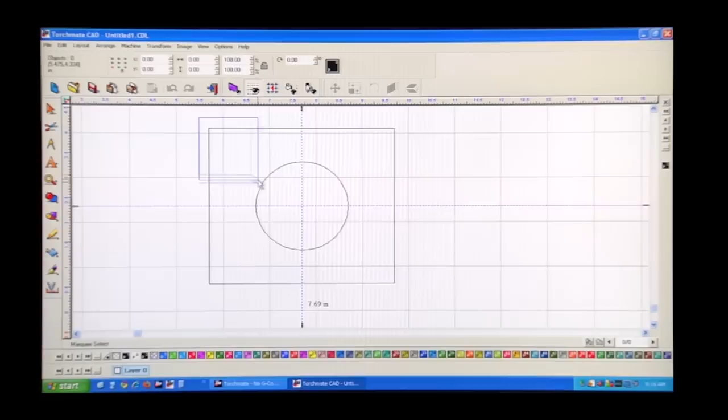We'll select both objects and we'll tell the computer that the circle is part of the square, so it's a hole now. And what that does is it tells the computer, here's my square with a hole cut out of it.

With Torchmate CAD, the important thing that it does is it will do tool paths. So anytime you're cutting, you want to specify the cut order. You want to cut your inside parts out before your outside parts. You want to have a lead in, because when plasma pierces, the pierce point is a bit wider than the rest of the cut. So you don't want to start right on the cut. You want to pierce, say, in the middle of your circle and move in and pierce on the outside of your part. And you also want to offset, because when you're cutting with plasma, there's a certain thickness to that cut, and if you cut right on the line that you drew, your part's not going to come out the right size. So Torchmate CAD, when you tool path, will do all three of those automatically.

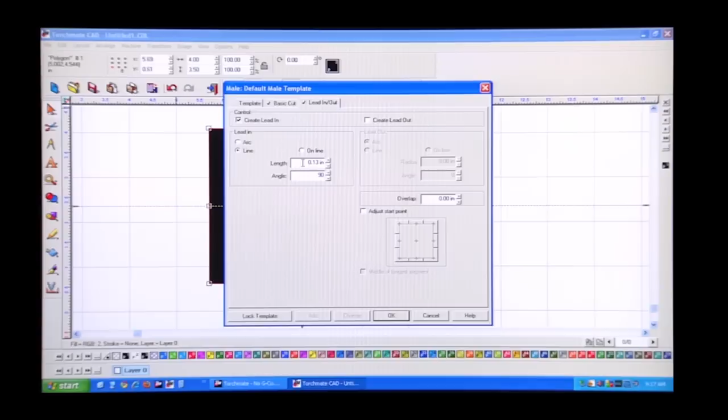So we'll just start out here, just create a tool path, tell it the length of the lead-in I want, tell it the tool that I'm using so it knows how much to offset, and we'll create that tool path.

And so what you can see that Torchmate CAD did as I zoom in here is we have our original object and we have the tool path it created. The tool path it created is offset a bit to the outside for that thickness of the cut, so that when you actually cut it out, you'll get the right size rectangle. It also created a lead-in, which is this is where it's going to start cutting, so that you're piercing and you're not messing up your actual cut.

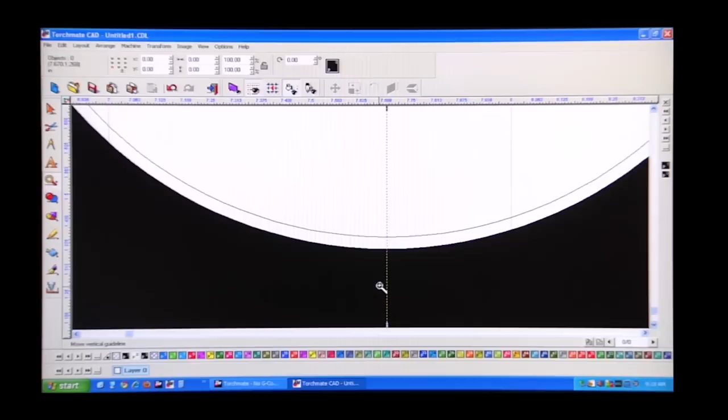So if we zoom out here and we look at the inside, we can see that it's cutting on the inside here, so you get the right size shape. The nice thing about Torchmate CAD is whether you're drawing in here or drawing in another program, bringing it into Torchmate CAD and tool pathing ensures that you're getting the right size parts with a clean cut every time. This is ready for cutting, and if we wanted to, we could go take this out and cut it. But we want to do a more advanced shape, so I'll delete the tool path for now.

We have our advanced shape here. Let's say we wanted to round a corner. I can go up to transform and tell it to round a corner. Enter the radius of the corner. Click on the corner I want to round, and then close it. So now that corner is rounded.

At the same time, if I wanted to insert a slot, I can do that, and I'll turn off the fill here. Just a useful tool to keep track of where your holes are and everything, but go ahead and draw a slot in here. I can size this as to whatever I want.

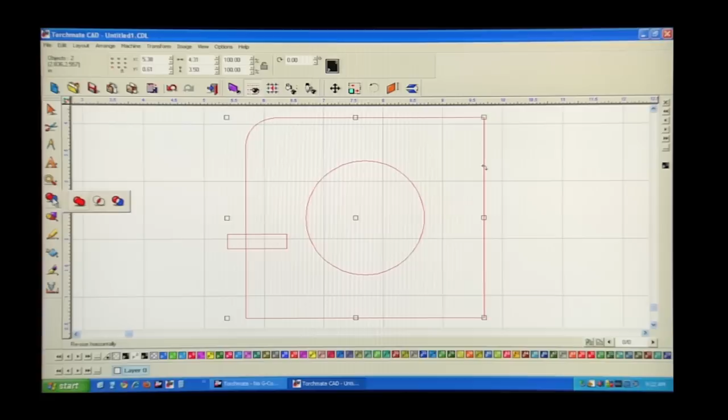I can then tell the CAD I want to cut this out as a slot, getting rid of our little remnant here. So now we have a slot in this part. Again, if we wanted to cut this out, we can go ahead and just tool path it.

Torchmate CAD is useful for drawing pretty much any shape, but if you had a bitmap, a JPG, or any other type of image from the internet or something you've drawn in another program, you can bring that in and create a toolpath on it as well and get that ready to cut.

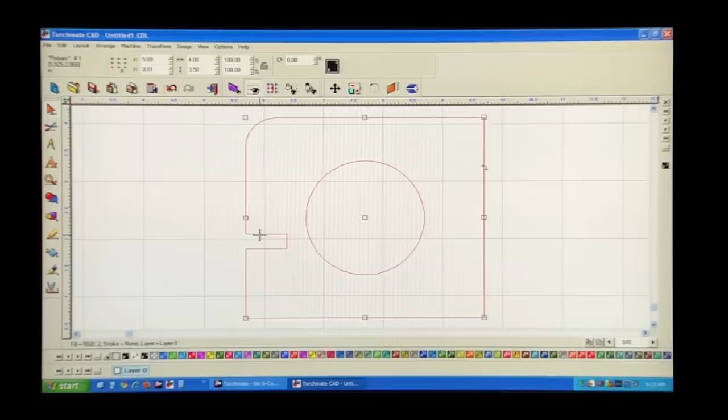So I'll bring in an image here real quick and go ahead and place that. Now it's rather small, and I can just grab it and size it up, or again, just like anything else, I can type in the size that I want. Let's make it 5 inches by 5 inches. We'll just zoom in on that.

So here we have a bitmap, just something drawn up off the internet. I'll go ahead and convert it just to black and white, so no grays or anything like that. And then we'll use our scan tools that are built into Torchmate CAD, and we'll go ahead and just do a quick trace on this.

And what Torchmate CAD will do is it'll go around and it'll find all of the lines of the image there. So we can close that now.

And what we have is our original bitmap. If I move that off to the side, we have the trace of the bitmap that we just did here. This is a simple trace of this object, and depending on what type of object this is or what quality of image you have, the trace settings can be changed to get you the best quality.

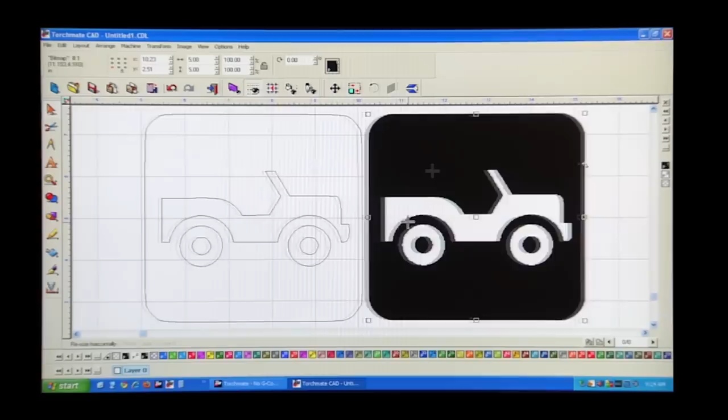So we're done with this image, and now we can go ahead and delete that, and we can work with our trace and get it ready to cut something out here.

So the first thing that I see is we want to go ahead and tell Torchmate CAD that this is all one object. And we can see in here that it sees it all as cutouts and everything like that. Now, one thing that when you're bringing in any image, it's just going to go ahead and trace that image, and that image might not be suitable for cutting right off the bat, but we can make it as such.

So I can see here on these little rims that we just cut those out, those little things will just fall right out. They're not attached, so we can either bridge them to the rest of the sign, or we can even just get rid of them. So for this one, we'll just go ahead and get rid of them.

We're cutting something out here pretty small, so I'll again turn off our fill and go ahead and break this into the individual components. So now I can go ahead and select all of these individual components, get rid of whatever I want. So I'll go ahead and get rid of the inside of these tires, and then I'll go ahead and make it one object again.

So now what we're left with is just a nice simple little sign created from a bitmap image. So I can go ahead and toolpath this.

So we'll go create a toolpath, cutting with plasma, and we're going to have a lead in. So hit OK, and now we've created that. So I can go ahead and select my toolpath, and I can export this out.

So we'll open up the Torchmate driver software here. This is the software that controls the table, and comes with all Torchmate tables. We'll go ahead and import in the toolpath we just created, so it's sign 1 right here. It's going to want to create the G code, which is the industry standard cutting commands for any machining process, so I'll go ahead and save that as well.

Then it's going to allow us to specify our cut speed, and that depends on the material you're cutting as well as the torch you're using. For our particular application, we're going to go 95 inches a minute. I'll go ahead and hit OK there, and it's going to bring this in.

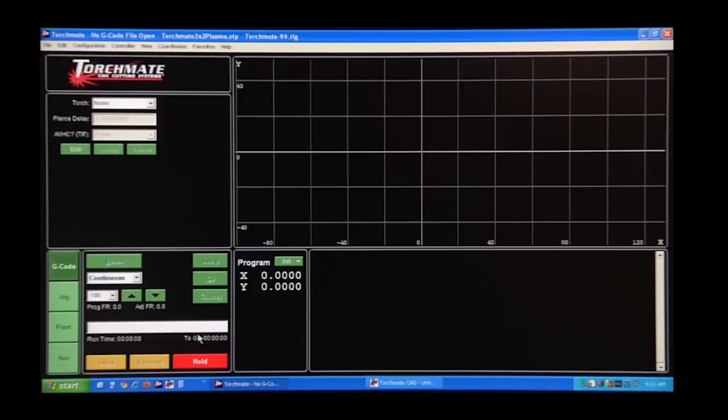So what the Torchmate driver software has done is create G code based on the toolpath we created, and it's also given you a visual display of how it's going to cut. There are solid lines that indicate actual cuts, and dotted lines that indicate where it's going to move.

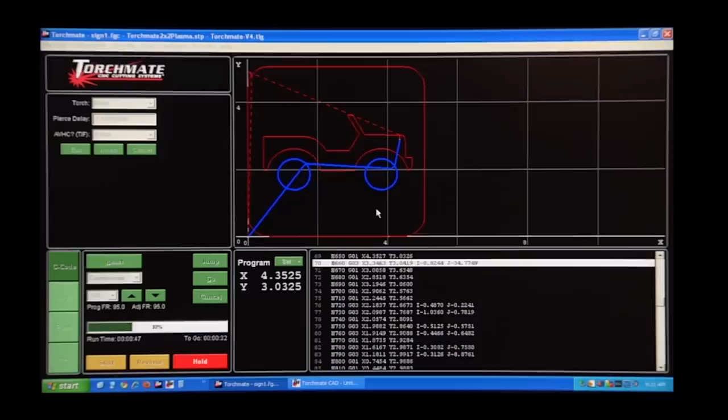So I can go ahead and just hit start here, and it's going to simulate exactly what it's done. We can see that because we toolpathed in the Torchmate CAD, the driver software is cutting out the inside of the parts first, so the inside cuts. Then once it's finished with that, it's going to cut the outside out.

As the driver software is running, it's giving you a countdown of how long the program is going to take, as well as what line of G code it's on. Now that it's finished, it will return home. Part's cut and looks good. We're ready to go. A couple other things I just want to show you real quick before we take this out and cut it out.

Back in the Torchmate CAD software, and this is really where we spend most of our time. The driver software really just controls the table and cuts out what we draw. So we'll go ahead and I just want to show a couple other things for you guys.

As mentioned, Torchmate CAD can bring in a DXF from any other program. So I have a DXF drawn in a different CAD software that I'll go ahead and just import in here. Again, just like the scanned image, I'll place it. It's going to give me some options as far as how I want to import that DXF, and these options can be set based on what program's creating that DXF.

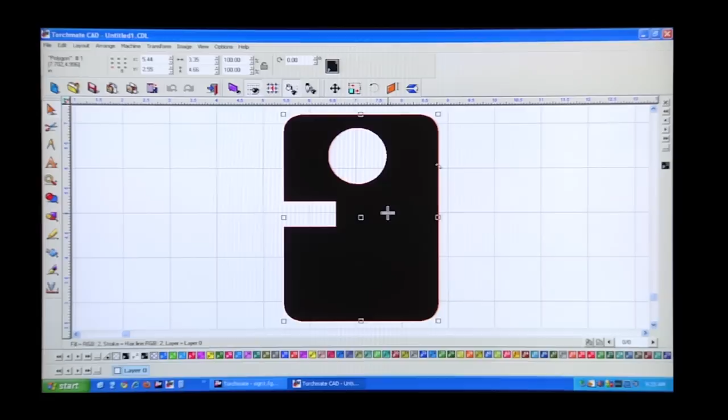What Torchmate CAD did is it imported this DXF created in another program, and now I'm able to treat this just like anything else in Torchmate CAD. I can toolpath this, I can nest it, I can duplicate it, and I can actually make changes to it.

So for this one, I just want to show nesting. I'll turn on our material blank here. Nesting allows us to have the computer automatically go through and arrange parts and maximize the amount of material you're going to be using. So we have our imported DXF here, but I'm going to go ahead and quickly draw a few basic other shapes to show what Torchmate CAD can do.

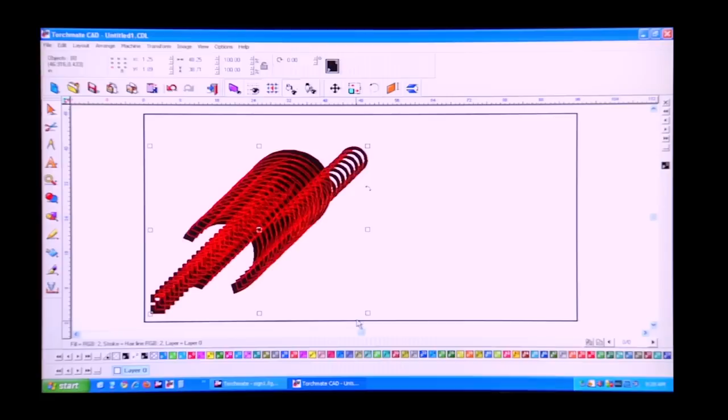So we'll have a couple little arches here and maybe a couple polygons. Then what I'm going to do real quick is make a bunch of copies of these that we want to cut out, and then I can go up to nesting here. What nesting is going to do is start at a certain corner, go a certain direction, try rotating parts in a certain amount that I've specified, as well as space between the edge of the material, space between the parts, mirroring the parts, fitting the parts together.

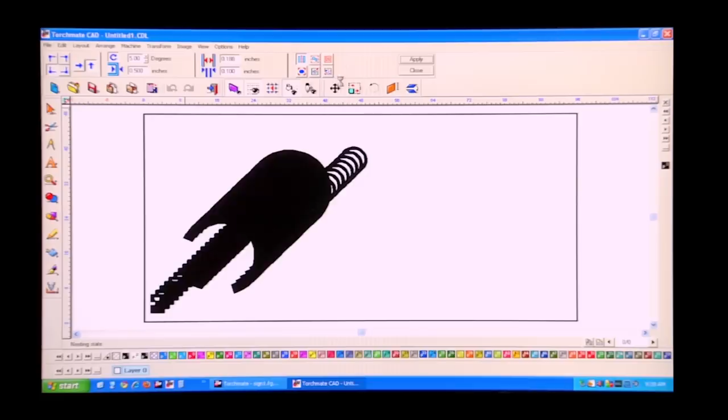Once I hit apply here, the computer's going to think for a second and try to arrange all these parts. As it finishes up, you can see that it went through and arranged all the parts to maximize the use of your material. Torchmate CAD can do this with one part or with thousands of parts, and it creates a money-saving option for you when you're drawing with Torchmate CAD. So these parts could be toolpathed and cut as well.

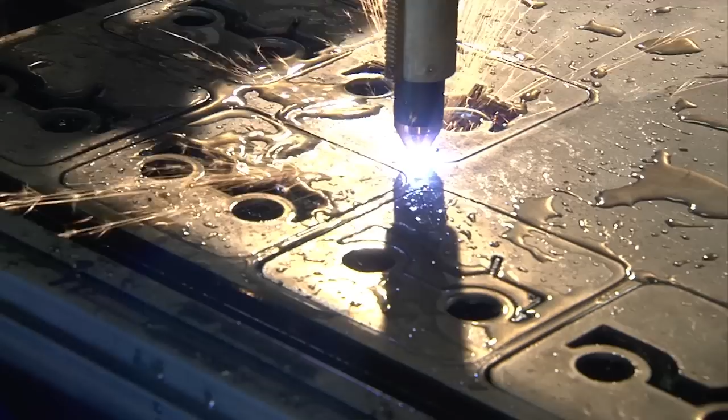So we've looked at a couple features of Torchmate CAD, and these are by no means all of them. With your Torchmate CAD purchase, or with any of our table purchases, you get free and unlimited technical support. They can answer questions about Torchmate CAD or anything else. Torchmate has all of the tutorials as well as how-to videos online available for download, so you can check those out as well.